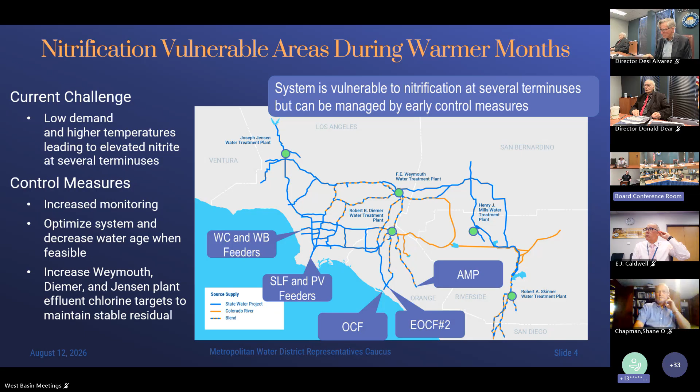So what we do is increase the chlorine residual target leaving those treatment plants. It used to be 2.5 milligrams per liter was our target. Then as the demand started to drop, we started to see the water age increasing in our system, so our new normal now is 2.7 milligrams per liter. As an action against combating these lower levels, we increase that target to 2.9 during the nitrification season, which is summertime.

Some of the control measures in progress now: we're installing water quality analyzers in all those vulnerable areas of our system that you just saw, so that we get real-time continuous monitoring of that system and the water quality in the area.

We use existing hydraulic models to predict the chlorine levels in the system, and that helps us identify areas where we may need to decrease the water age in the future. This predicts the water age based on what we predict for the demands.

Currently, we have some sodium hypochlorite feed systems being installed all throughout in-basin. What that does is enhance the chlorine levels in the distribution system, which helps control the naturally occurring bacteria found there. By minimizing that, you have less potential for that biological process to take place where you form nitrite, which would impact the disinfectant residuals. One of the main chlorine systems we're rolling out is being installed here on 108th Street, just up the road from Palos Verdes Reservoir.

And that should help us with one of the areas that we're challenged by right now, and Uzi's very familiar with that. Another step that we take is optimizing proactive control measures.

Right now, we are looking at 2.9 milligrams per liter, and that's what we're implementing. But we are looking at increasing that chlorine residual even more. We have to balance that with formation of disinfectant byproducts and other undesirable water quality consequences of increasing the chlorine target. So we're continuing to evaluate increasing that chlorine target.

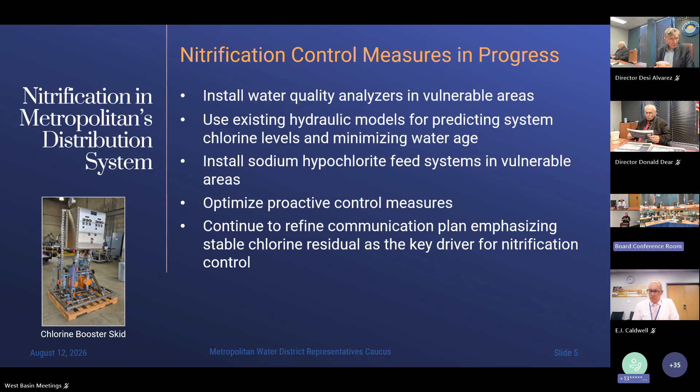And then lastly, we continue to refine our communication plan. We really have to emphasize that we're not as much concerned with the toxicity of nitrite and nitrification as we are with controlling the amounts of nitrite in the distribution system to maintain a stable chlorine residual. So maintaining a stable chlorine residual is the driver for nitrification control at Metropolitan.

Just a quick summary on my update for water quality. Nitrification is a common challenge for agencies using chloramines - it's been since the beginning of time. Nitrification is becoming a more frequent issue with extended periods of reduced demand.

And here at Metropolitan, we continue to expand our knowledge of member agency operations during nitrification events, and we'll leverage this knowledge to develop and refine our long-term approaches to improve nitrification control overall, not just for ourselves but for the region and our customers.

Continued coordination with our member agencies is essential to producing regionally beneficial solutions that minimize the impacts of nitrification. I've worked with Uzi quite a bit and very closely, and that's why we're here today to look at some of the options we may have to help the region out with water quality issues.

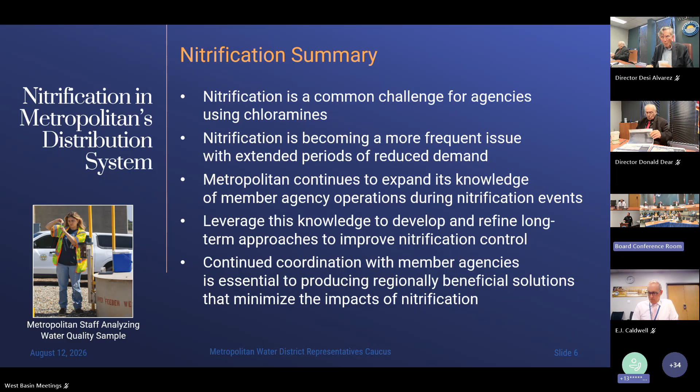Good afternoon, everybody. My name is Randy Chow with the Metropolitan Operations Planning and Programs team. We work on analyzing member agency demands, strategically managing and forecasting Metropolitan's water surplus and drought conditions, and operations as well. As Victor mentioned, lower demands have been a challenge operationally for Metropolitan with increased water age, more stagnant water in our pipelines, and increased temperatures.

Our distribution system does become more susceptible to potential nitrification, specifically at the pipeline terminuses as Victor mentioned in our area - we call it the common pool, or also known as the central pool. They're used interchangeably. Specifically at the pipeline terminuses, you can see on the map the West Coast feeder, the West Basin feeder, areas around the PV reservoir and the PV feeder, and also some pockets of the second lower feeder.

We identify the common pool as the service area, or group of service connections, that can take treated water from our Jensen plant, our Weymouth plant, and our Diemer plant. So you can see on the map here, highlighted in the blue blob - that's what we refer to as the common pool.

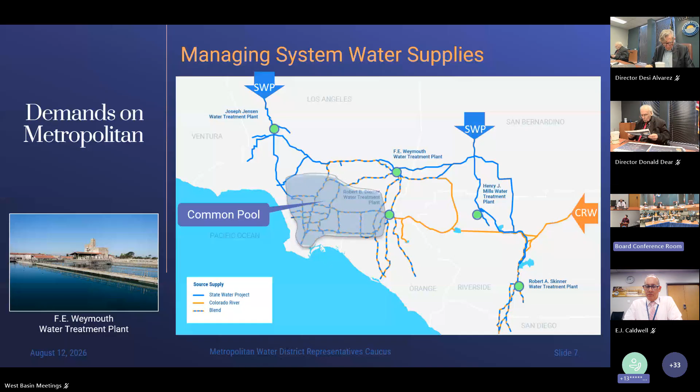Some member agencies have identified decreases in Metropolitan and overall demand due to several groundwater wells returning back into service, utilizing more local supply, and relying on more in-region storage. Additionally, there has been an increase in conservation measures and the need to reduce demands to meet future state requirements, such as the urban water use objectives.

Overall, the record low demands from Metropolitan has played a critical factor in water age and potential nitrification. This is where Metropolitan has identified that modifications to the OSCOP program can be an effective management tool to address some of the needs and water quality concerns that Victor has mentioned. I'll pause here for any questions.

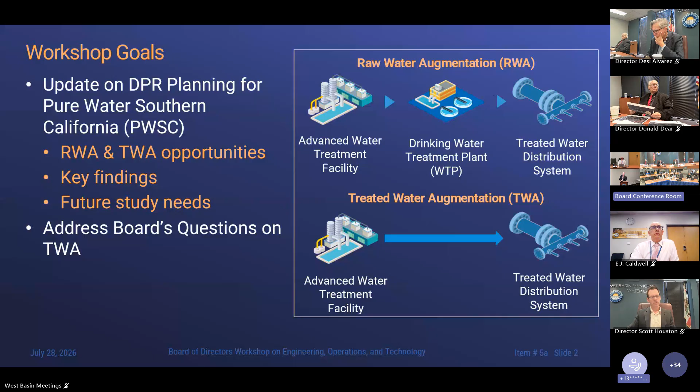Just to clarify, raw water augmentation includes starting at the advanced water purification facility, going to a drinking water treatment plant like Weymouth or Diemer, and then into the treated water distribution system. For treated water augmentation, that starts at the advanced water purification facility and goes directly to one of our treated water feeders, such as the second lower feeder, for example.

Some of the benefits of doing raw water augmentation versus treated water augmentation: raw water augmentation allows your water quality to be distributed over a larger area, so you get more consistent water quality, maintaining that water quality throughout our system. Raw water augmentation is better for that. Treated water augmentation gives you less pipeline. So while you may have pockets of different water quality throughout the system, you have less pipeline potentially to get to each one of the treated water augmentation facilities. So that gives us a little bit of a benefit.

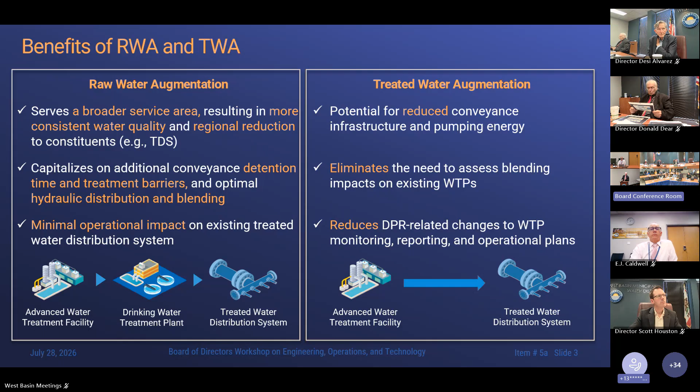So I'll talk about demand projections. This is your favorite topic, I'm sure, talking about how we came up with and evaluated the study. We did do a Monte Carlo demand simulation model. So what's a Monte Carlo simulation? It's a computational model that uses multiple sampling to come up with a range of possibilities.

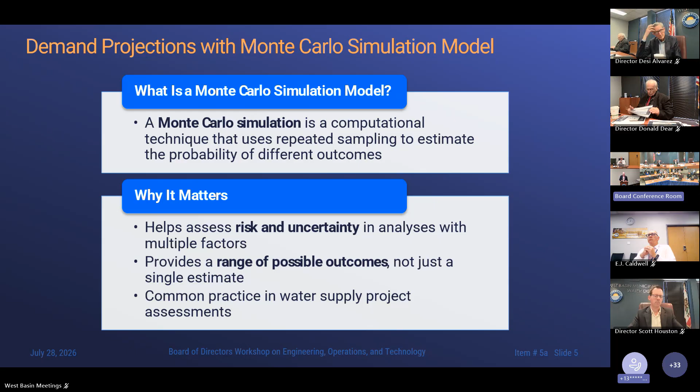We had 16 different factors that we evaluated, so ultimately this is perfect for Monte Carlo simulation modeling. We had 16 different varying factors, and I'll walk through the general categories of each one. First of all is member agency demands - what would those look like for each of our member agencies, including West Basin's demand on the system?

Our water treatment plant demands - that would primarily be for raw water augmentation. And then we'd have our treated water system either at the second lower feeder or the middle feeder. We then layered on top of all that different hydrology: wet, dry, extreme dry events, earthquake events on top. We also added the integration issues you might have when inserting into a feeder, how that might be integrated together, and really looked at downtime - how does that work, what assumptions should we make regarding downtime.

Things we did not look at in this study - and Victor, these are all your categories - water age, nitrification, some of the treatability at the treatment plant. So if we were to do raw water augmentation for our final phase, what does that do to water quality? And would we still have good treatability at Weymouth and Diemer? There would also be hydraulic concerns within the central pool. It's good that Randy showed us the central pool figure, because I don't have to show it to you now.

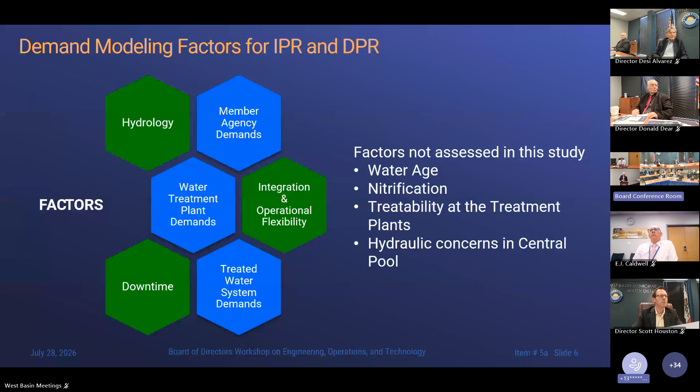Can I ask real quick - what exactly does downtime entail? So downtime, and I do have a slide about this coming up, is basically how much time you're going to be offline for different factors. There may be times, for example, when injection wells will be down for maintenance, or the facility will be down for maintenance. So we have to make certain assumptions about that - that's what we're talking about when we talk about downtime. Thanks - I think I have a slide coming up.

Oh, I may have jumped ahead of that, but that's okay. So there are 7 partners that have proposed to use purified water. These are the 7 agencies.

This would show the range of demands that each one of those would get. You can see here West Basin has the highest proposed demand off of the pure water system. Also in the yellow circle is the median, or the 50th percentile.

So that gives you a good idea of the potential range. And when you have all of these individually, you've got to figure out how you're going to put all that together. This is kind of where this Monte Carlo simulation takes all the ranges and puts it together into a range that you can really look at.

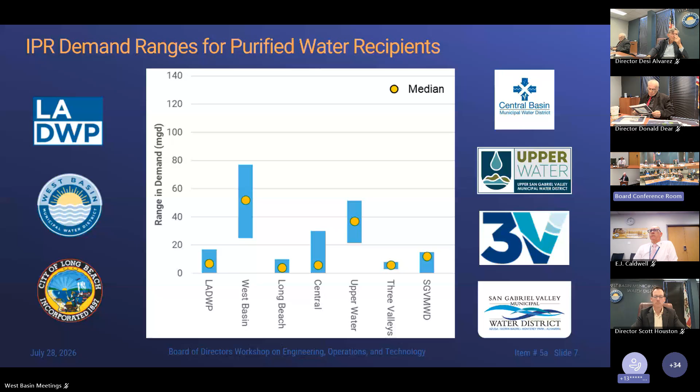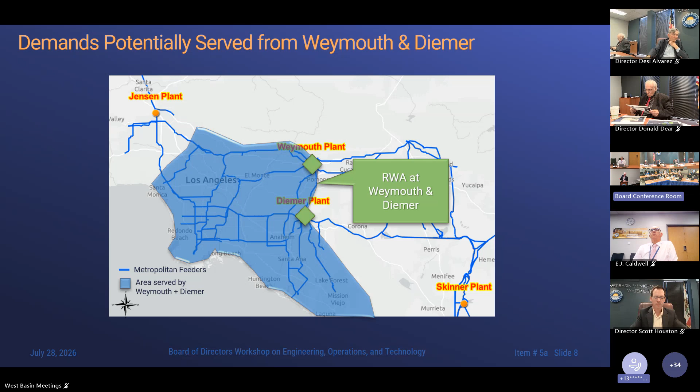This map shows you where currently, if we were to take water up for raw water augmentation, where that water would go today. And as you can see, it's most of that central pool area. If we had our drought project, our future Venice Sepulveda pump station project, which Metropolitan has begun construction on.

And as we move forward with that, you'll be able to get all the way up to Jensen from Weymouth or Diemer locations. And this would serve 22 of the 26 member agencies. Not saying that the other 4 agencies aren't benefiting, it just means we're getting direct deliveries to 22 of the 26 member agencies.

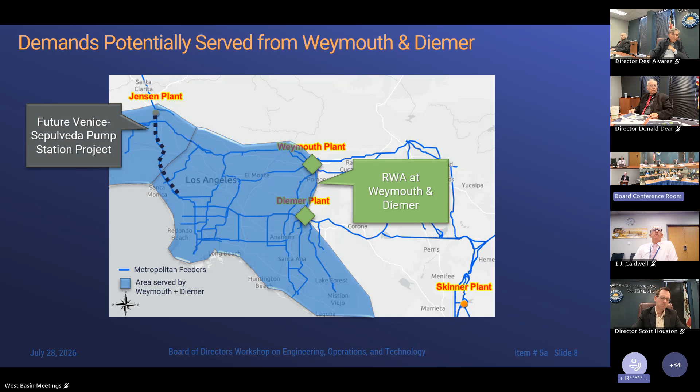This is Director Alvarez's favorite option here, which would be to go to the second lower feeder. If we went to the second lower feeder, this shows you where that water would actually move to directly. And then if we had the future Venice Sepulveda pump station project online, that could get all the way up to Jensen. This would serve 18 of the member agencies.

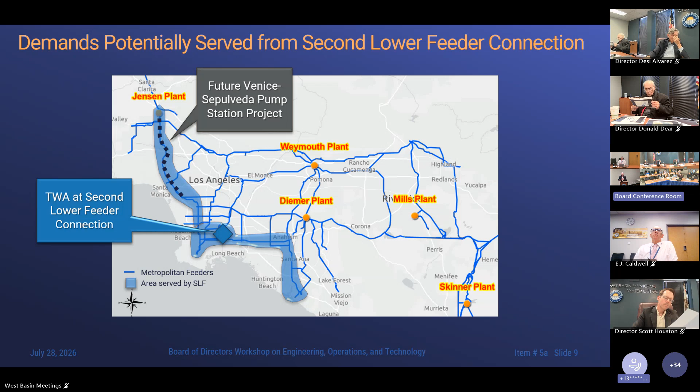But again, not saying that not everybody would benefit, just that we'd have 18. And then this would be where the water would go from the middle feeder. If we were to do that, this one would give you 13 of the options. But again, everybody would benefit if we brought it up to the middle feeder. So this gives you kind of the overall where the water goes, how that would be impacted in the system.

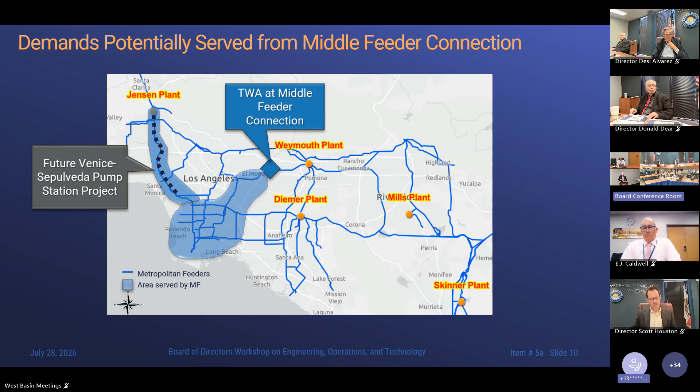Again, this would be providing water quality benefits to this region here in West Basin in particular. Most of that area is West Basin. But then some of the other areas, there may be different water qualities in different parts of the system. So that's something Victor's going to have to help us evaluate.

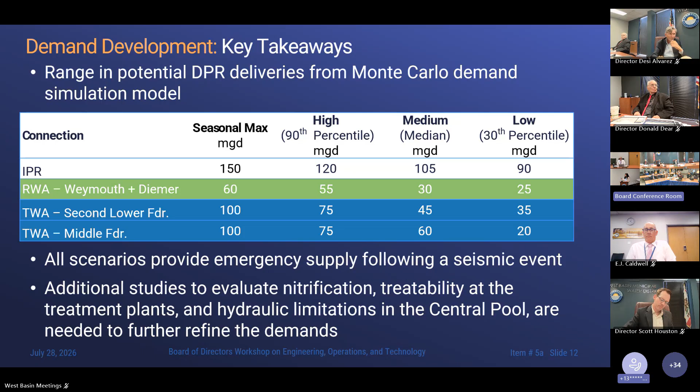So you've probably heard a lot of it already, and Matt was able to cover his slides in less than 10 minutes, but it may take me a little longer. But thanks to Matt and my Metropolitan colleagues for kind of building up the case for me, so there's a lot of background that has already been covered.

So I will start with this slide that Matt already covered, the low, medium, and high scenarios. I'm just going to show you this matrix we developed for all the potential DPR implementation, including the baseline, which is our RWA, that's the very left one.

One alternative scenario that we decided not to cover is scenario 2, the TWA at Weymouth, but we don't have enough time, so we're going to skip why we did that. We can also do TWA at our feeders, as Matt mentioned earlier, and the difference would be just the treatment locations and the process trains we'll be considering. Subsets of each scenario were also developed to cover the demand ranges and the feeder locations.

So we don't have time to go through all the DPR treatment trains today. Very briefly, the regulatory prescribed DPR treatment train, which we call the default train, can only be accommodated at the AWPF with Pure Water's current configuration, because it needs to take place before the reverse osmosis process. Other potential post-RO alternative trains could be considered at satellite treatment facilities.

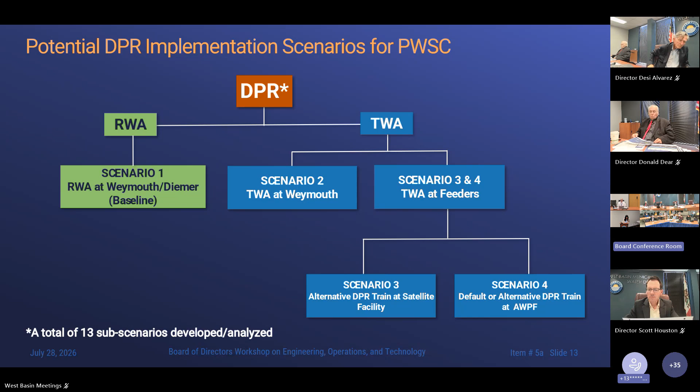Is there a faster way to... okay, here. This map includes the location of the treatment, the needed conveyance with color-coded pipe sizes, the potential seasonal max and median demands, and the feeders that may be receiving the water within Metropolitan's distribution system.

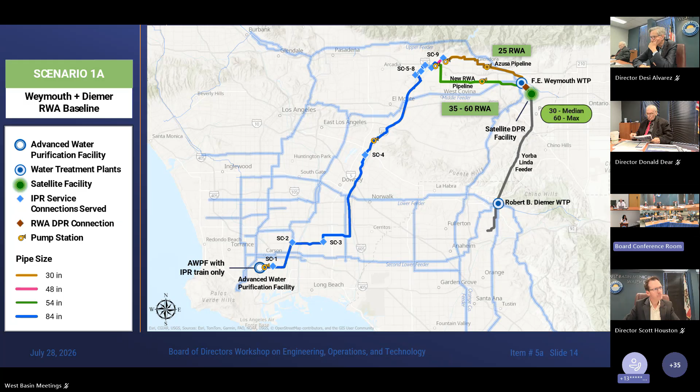This first one is the baseline with RWA at Weymouth and Diemer. Delivery of IPR water to Weymouth would be through the 84-inch backbone pipeline, shown in dark blue, followed by either the existing Azusa pipeline, shown in orange, or a new dedicated pipeline, shown in green. Water treated at a satellite facility to DPR level can be delivered from the Weymouth plant to Diemer via the existing Yorba Linda feeder, shown in gray on the very right. The feeders that could potentially receive purified water are shown in the lighter shade of blue in the background, which is essentially Metropolitan's central pool.

Is this one better? I think this button is better. This is a similar sub-scenario.

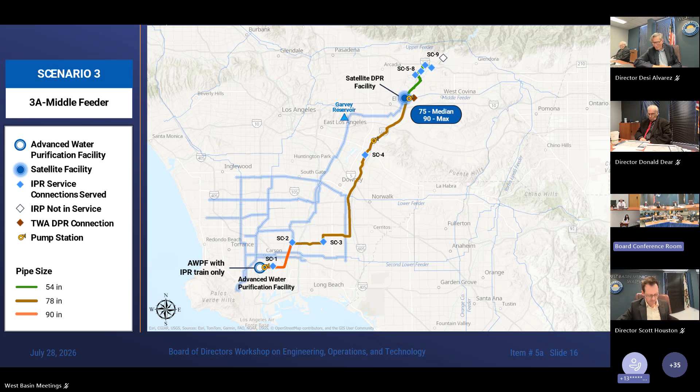Considering sending DPR treated water to the middle feeder, we would also potentially deliver about 75 MGD medium flow in a high TWA demand scenario. We could take advantage of the Garvey Reservoir to provide some engineered buffer capacity. Under this scenario, more feeders could receive the water, as shown in the lighter shade of blue here compared to the earlier version. Water could also potentially reach San Fernando Valley, it's just not shown here. The backbone pipe size would be 78 inches in this case for the water delivery.

Scenario 4 includes several subsets. We could site all needed treatment at the AWPF, using either the regulatory prescribed default DPR train or an alternative train. This would eliminate the need for a satellite facility. We could also separate the IPR and DPR treatment at the AWPF and deliver purified water via separate pipelines.

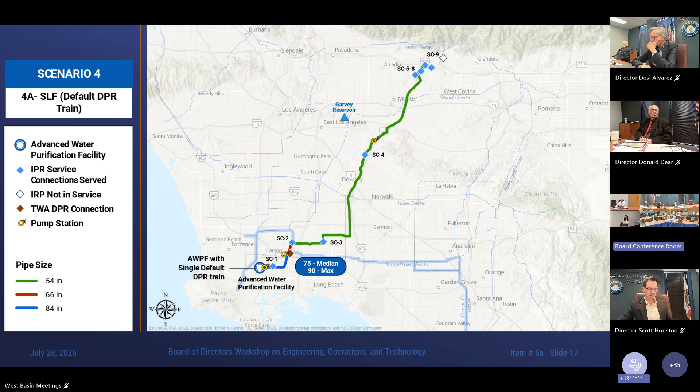This map shows the scenario integrating IPR and DPR treatment, so the delivery will be in one pipeline. TWA connection would be at the second lower feeder, and the backbone pipe size would be 54 inches. Additional maps and analysis can be found in the TM if you're interested in other scenarios.

Engineered buffer with sufficient capacity would be really crucial for TWA implementation, to provide needed response time as well as surge protection for our feeders. We provided some buffering capacity at the AWPF clear well in our conceptual design. However, we still need more capacity to allow emergency response and operational flexibility.

At this time, we have not located a feasible site large enough to accommodate the capacity needed. So we actually ended up analyzing our existing reservoirs to see whether any of them could be feasible for TWA, such as the Garvey Reservoir along the middle feeder and the Weymouth Finished Water Reservoir. The Palos Verdes Reservoir, along the second lower feeder, is at the end of our distribution system and would provide very limited benefits in this case.

Garvey Reservoir has the largest capacity for buffer and demand management, but it may have issues with nitrification or limited feeder capacity. Additional study would be needed to further evaluate the potential to use it for TWA.

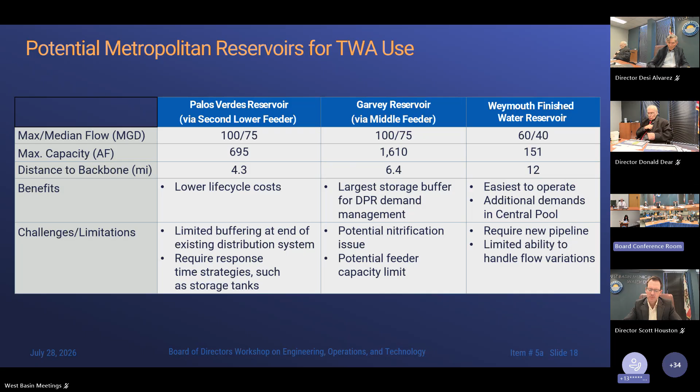The Weymouth Finished Water Reservoir is not ideal because it is far away, 12 miles from the backbone pipeline, so you need to build more conveyance. The reservoir may also have limited ability to handle flow variations. So we need to conduct siting studies to identify additional locations for engineered buffer consideration.

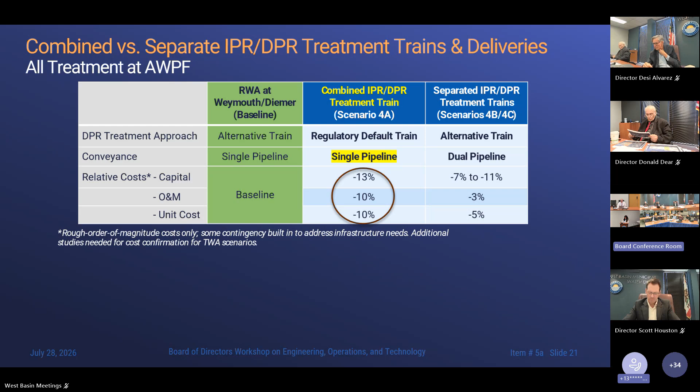This is also a similar analysis based on all treatment at the AWPF without the need of a satellite facility. We could realize about 7 to 13% savings for the capital cost with TWA. All three flow scenarios would result in reduced life cycle costs, with a range of about 5 to 10%. Interestingly, and it may be counterintuitive, the option that uses a combined treatment IPR and DPR train to treat the entire 150 MGD flow has the most capital, O&M, and life cycle cost savings.

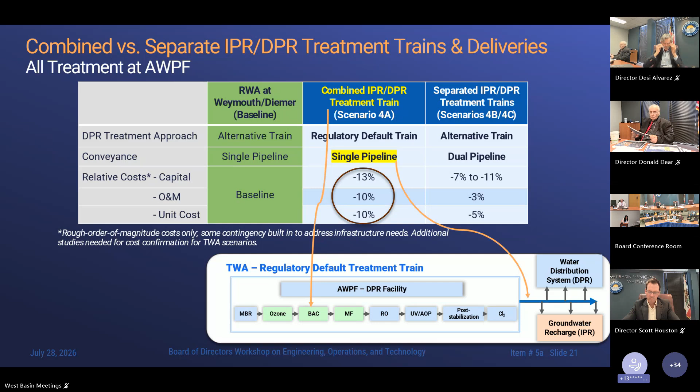Any questions so far? This may be a complicated one, but basically that's the message there.

Now here are our takeaways from the analysis. We believe both RWA and TWA are feasible for pure water, and there are opportunities for conveyance system cost savings with TWA. Our analysis shows that combined IPR and DPR treatment at the AWPF with a single pipeline is more economical than separate treatment with separate delivery pipelines. We still need to perform more studies to refine the analysis and cost estimate.

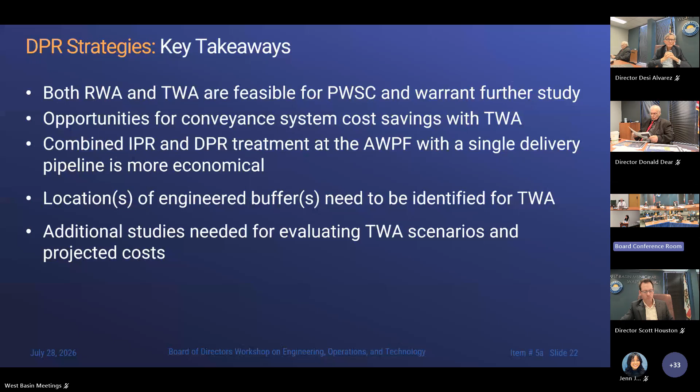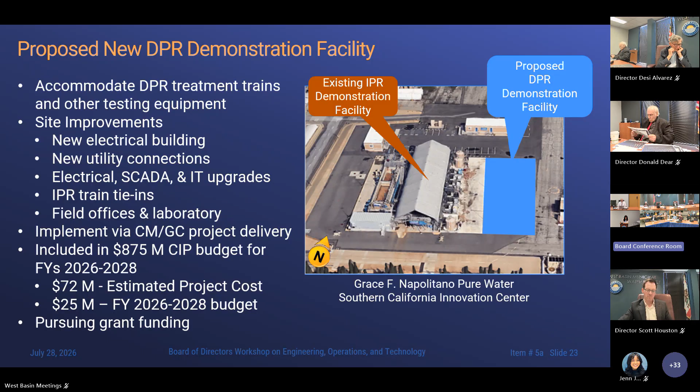To demonstrate the effectiveness of the default train and show the equivalency of the alternative trains, we need to build a demonstration facility. We're about to issue an RFQ for the CMGC contract to add the facility right next to the existing IPR facility at Grace Napolitano Pure Water Innovation Center, shown on the right in blue. That will be the new demonstration facility for DPR. This project will be funded by Metropolitan's current biennial budget, as well as grant funding we're currently pursuing. We would be able to start testing in about 2029.

You can see the potential DPR demonstration facility layout in this 3D rendering. We plan to start with a demonstration scale default treatment train using ozone BAC MF, in combination with the existing IPR train and 4 pilot scale alternative trains.

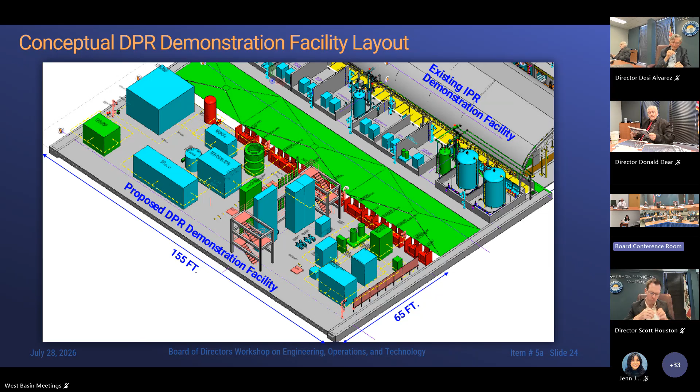If we have more time I'll get into detail, but we still need to conduct water quality studies, hydraulic operational modeling, and so on. In addition to the demonstration testing mentioned earlier, we need to look into other water quality impacts such as water temperature, nitrogen targets, chemical feed dilution, post-treatment stabilization, corrosion, water age, and nitrification, like everybody was talking about earlier. More hydraulic and operational modeling is needed so we can have a closer look at blending, engineered storage of off-spec water, and treatment residual management.

Finally, we need a siting analysis for the potential DPR satellite treatment facility, as mentioned earlier. We will continue our public outreach effort and include additional DPR information to allow us to move forward. For that, we plan to include a tasting station as part of our demonstration facility addition.